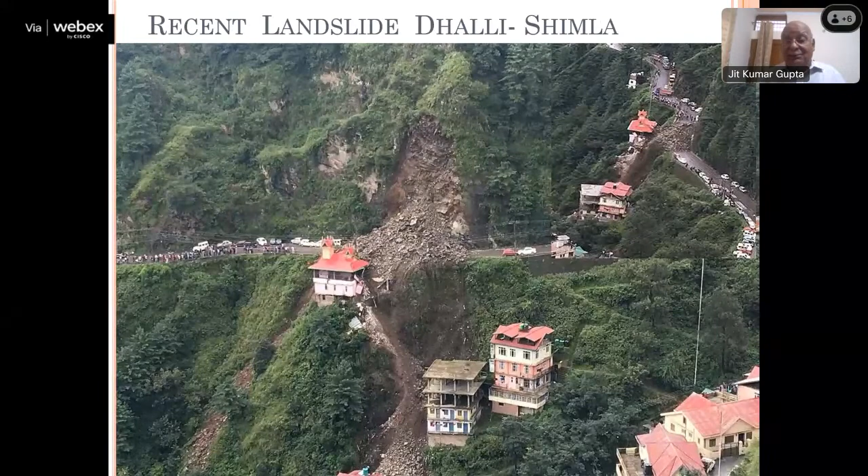This is where landslides in hill areas are becoming the order of the day. Landslides are a major issue, and flooding too is becoming more frequent in hill areas. But when you look holistically at the entire issue, it concerns soil, ecology, flora and fauna, and scientifically cutting and felling of trees.

Unfortunately, land remains the biggest hiccup, and its use and abuse has become a normal process in hill development. I think land needs to be looked at more holistically if hill area development is to be managed.

In hill areas, there is a problem of demarcating land holdings. There is poor record-keeping and a lot of land speculation going on. There are no policies and programs on how to manage land for urban and rural development, and there is irrational and unscientific subdivision of land, which is leading to a lot of problems in rural and hill areas.

When you look at hill areas, the second problem is mobility, that is accessibility, and it is always very difficult. Unfortunately, we are basing more on road-based mobility, and you can see the way highways are being created in hill areas. I think they have their own implications. There's no problem in promoting mobility and accessibility in hill areas—that becomes the lifeline. But when they are done unscientifically, without looking at the structure or the typology of how roads are to be planned, these things create a lot of problems.

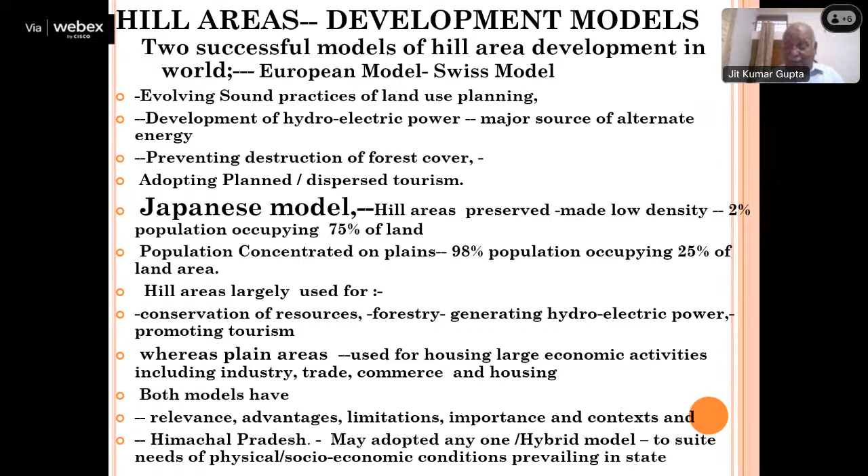और वो दो जो सिर्फ 75% एरिया में 2% पॉपुलेशन रहती है, और 98% पॉपुलेशन बाकी के 25% एरिया प्लेन एरिया में रहती है। तो उन्होंने हिल एरिया को रिसोर्सेज के लिए, फॉरेस्ट के लिए, हाइड्रो इलेक्ट्रिक पावर और टूरिज्म के लिए रखा है, जबकि प्लेन एरिया में सारी हाउसिंग, इकोनॉमिक डेवलपमेंट, ट्रेड एंड कॉमर्स, जितनी अर्बनाइजेशन है वो रखी है। ये दोनों मॉडल के अपने एडवांटेजेस हैं।

दुनिया का सबसे बड़ा जो सिटी है वो जापान का टोक्यो है, जिसमें 34 मिलियन पीपल आर रिजाइडिंग। Regional planning, we know this is advantageous over urban planning. जब तक हिल एरिया में रीजनल प्लानिंग नहीं करेंगे, तब तक we will not be able to achieve and prevent these kind of disaster, because in hill area the region planning takes care of the entire stock of the state itself in terms of resources.

Land use planning जो करनी है उसमें हमने clear define करना है area which are very sensitive, area which are medium sensitive, और जो low sensitivity के हैं। हाई सेंसिटिव एरिया को हमें प्रिजर्व करना है, और डेवलपमेंट जो है वो लो सेंसिटिव एरिया में निकाल के लेनी है। ये एरिया रीजनल प्लानिंग के लिए बिल्कुल डिफाइंड है, नेचर खुद डिफाइन करती है, जिसको हमने समझना है और आगे इंप्लीमेंट करके ले जाना है।

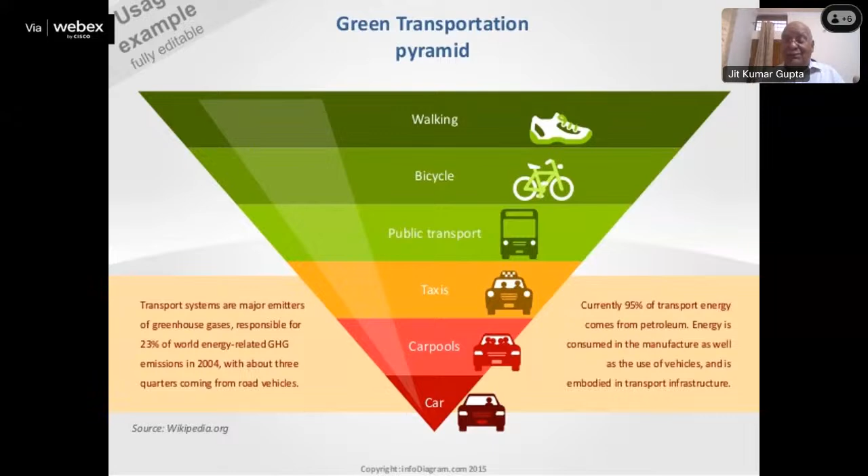उसके बाद हमें सिटीज को कॉम्पैक्ट बनाना है, सो दैट दे आर नॉट मेल्टिंग, दे आर नॉट स्प्रेडिंग एवरीवेयर, दे आर ओनली कन्फाइंड टू एरियाज which are plain area which can take up, or their capacity is limited। फिर हमारी अप्रोच बेसिकली मोटर बेस्ड अप्रोच नहीं होनी चाहिए, पेडेस्ट्रियन या मास ट्रांसपोर्टेशन बेस्ड होनी चाहिए। तो हम एक्सेसिबिलिटी की बात करेंगे, मोबिलिटी की बात नहीं करेंगे, और प्लानिंग फॉर पीपल करेंगे, प्लानिंग फॉर व्हीकल नहीं करेंगे।

टूरिज्म को हम ध्यान से देखेंगे ताकि टूरिज्म रिमेन सपोर्टिव, and the best model remains the model of Switzerland. Then heritage is another area which needs to be conserved. लेकिन सारी लैंड की प्लानिंग जो है, land suitability analysis, this is a method which needs to be implemented, because the entire area of Himachal needs to be mapped in terms of the land suitability - land which is suitable for construction, land with preservation and protection. जब तक ये नहीं होगा तब तक आपकी growth and development rational नहीं होगी।

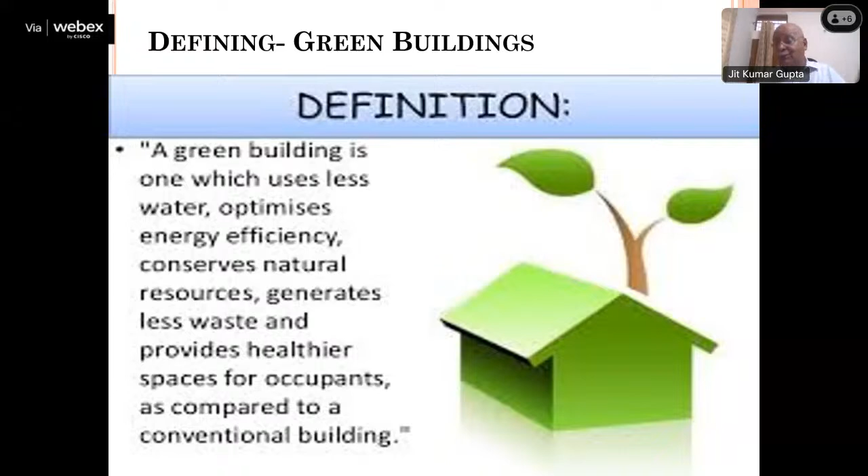Of course, leadership remains very very important. और उसके अलावा जितने भी built environment हैं उन्हें बड़े ध्यान से देखना है कि वो आपकी स्लोप को देख के, स्ट्रक्चर को देख के, टाइपोलॉजी को देख के बने, और आप ग्रीन बिल्डिंग जाएंगे तो आप वैल्यू एडिशन कर रहे होंगे। ग्रीन बिल्डिंग इट्स वर्किंग विद नेचर इटसेल्फ।

तो अभी बात की गई शैलेश पाठक जी ने कि हिल एरिया रेटिंग के लिए है, और अभी सौरभ जी बताएंगे डिटेल में हिल एरिया अडॉप्ट करने के लिए ये जो रेटिंग करने से हाउ यू कैन रैशनलाइज द डेवलपमेंट ऑफ द हिल एरियाज। लेकिन लास्ट में मैं ये कंक्लूड करूंगा, हिल एरिया में अगर डेवलपमेंट करनी है तो नंबर 1, देयर इज नो ऑप्शन अदर देन द प्लान डेवलपमेंट।

फिर सेकेंडली हमें जो करना है, development without destruction, and development based on sustainability. Then we have to have empowering the state in the knowledge and expertise that hill area को कैसे डेवलप करना है, प्लान करना है।

रीजन प्लानिंग की बात की, और रूरल एंड अर्बन को बोथ करना है, और उसमें कैपेसिटी बनानी है आर्किटेक्चर और टाउन प्लानिंग डिपार्टमेंट यूएलबीज में, ताकि दे कैन लुक आफ्टर वेरी क्लियरली। और इनमें सिनर्जी भी लानी है। हर डिपार्टमेंट को एम्पावर करने की जगह उनको क्लब भी करना है। और अल्टीमेटली अगर एक डिपार्टमेंट इनको क्लब करके एक जगह ले जाया जाए तो दे कैन वर्क मोर इफेक्टिवली एंड एफिशिएंटली।

और ह्यूमन सेटलमेंट को हमने पूरा सस्टेनेबल और इफेक्टिव एंड एफिशिएंट बनाना है। और जो लोकल नॉलेज, वहाँ का एक्सपीरियंस, एक्सपर्टीज इतने साल का है, उनका फायदा उठाना है। इसके लिए involving people and community will remain very very important, but nevertheless I would say it will be more empowering the local community and the people, and looking holistically। You can't divorce hill area from the plain area, because the growth and development of plain area, jitni bhi flooding ho rahi hai plain area mein, they are all basically what is happening wrong in the rural hill areas।

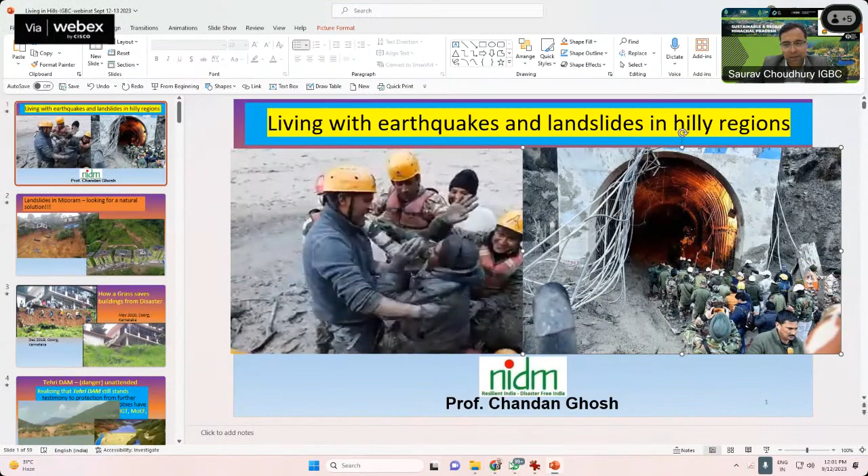Okay, first of all sir, thank you for giving you the presentation rights. I'm just sharing the presentation. Please go ahead and share your entire screen. Is it coming? Yes sir, we can see it. It's coming, full screen, and then we can see. Let me... yeah, at the bottom, the fourth one. Yeah, yeah. Okay, is it, is this the slide? Can we see? We can see some notes or a script on top. Is it looking, actually there's a dual screen sir. If you could just go back and share your screen again, you can press escape and share it again. I think there is some issue. Stop, is this... yeah you can press the escape button, I think it will go back. Okay yeah, you can share again. Something is happening, let me check. Maybe you can restart the application for the PowerPoint. Yeah, you can convert it into PDF sir, sometimes if there's not much animation it is okay to convert it. Yeah it's coming now, or you can present it from this mode also, it's fine. Generally, let me put it in F5, it should go as full screen. Yeah, now it's full screen.

Please, okay, thank you. First of all, thank you for this wonderful session, especially the ecosystem to be followed in hill areas, which has shaken us without even an earthquake, with the rainfall and the kind of development work that is going on. Nothing much to say or elaborate, but we are seeing that whatever we have been creating, whatever way we are trying to foray into the hill area, is not sustainable. So in this presentation, I would like to take you towards how to live in the hill area. Even though earthquake is a separate issue, I will first show a few things about how to live in an earthquake area.

I am not showing what is resilient structure, but what kind of construction we are doing in the hills and how they are to be tested before earthquake, during earthquake, and after earthquake. The first photograph you can see, you all remember 7th February 2021, the Tapovan area, the Vishnugad area got totally flooded — not flooded, I would say it is all debris that came more than 20 kilometers away, which was not known to the construction workers, resulting in many people dying.

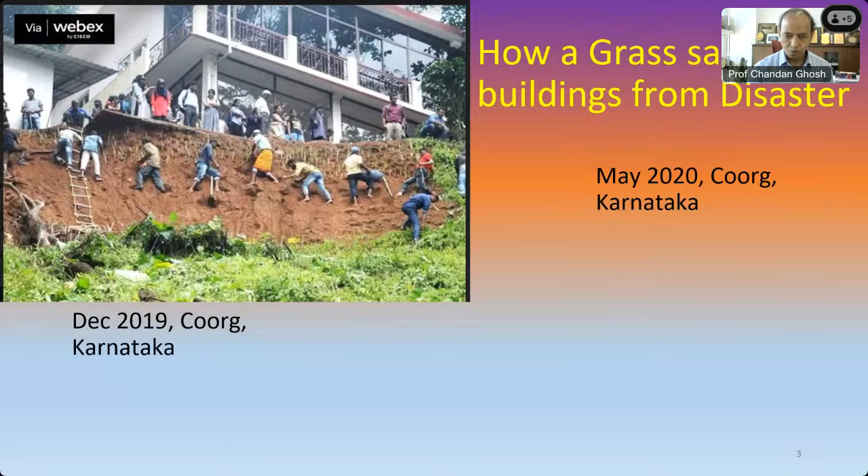So those have been planted in December, and then they could grow in six months of time in this manner. We may like to do a lot of research on how the grass has worked, maybe a lot of thesis work, presentation, or research reports can find out. But the reality is that they have been able to take care of the building, where community people came over to see that grass being planted.

And this is how it has been able to save, which cannot be accepted so easily by the geotechnical engineering or geology or bioengineering community, or especially geotechnical from the civil engineering field. They may take this just as a case study, saying it just worked like a fluke, but it is not like that.

Let us take such kind of eco-restoration by natural resources very seriously, and take care of many of the landslide situations shown over here. These can be easily handled, rather than allocating several crores of budget, which becomes a game changer in our society, whether from the professional side, the management side, or the landslides that we are facing.

So let us take it in reality, how they work over here. Site selection and selection of the grass becomes very important. It is just to say that we are having the Tehri Dam, which is the country's highest dam. And we are also bothered about the siltation, that its reservoir getting filled up every time.

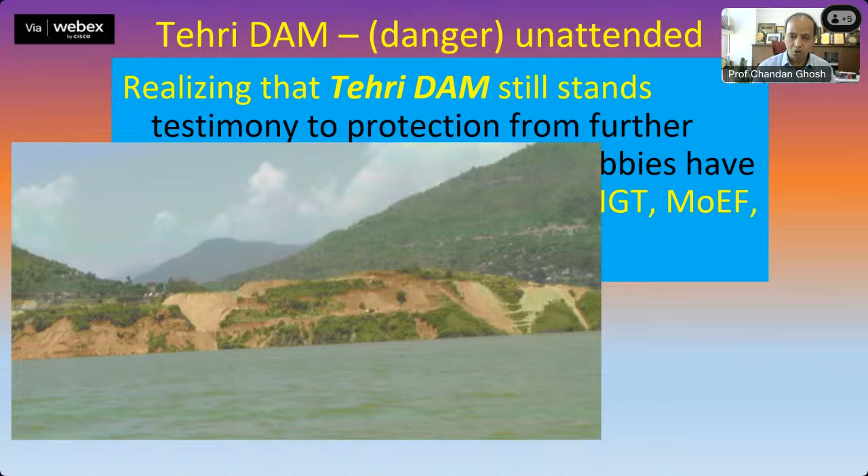Let us not just get overlooked by the way things are displayed in some seminar or exhibition, showing how beautiful it looks that we have the country's highest dam, 262-meter high. But the actual health condition of the reservoir is like this, which is being neglected, or in the process of making a huge plan for taking up desilting work every year or after some interval.

Let us also look at the fact that several dams are under construction. We cannot afford to have some other alternative, but wherever it is feasible, they have to be made. But at the same time, we have to find out certain alternatives, when such kind of dams are creating a lot of trouble in the ecosystem.

And climate change, and many other effects of seepages, and many such biomass are getting, rather ecosystems are being modified. So what are the impacts that it is causing to our environment? We are not able to take care of this through the EIA, environmental impact assessment.

In fact, from our side, many of us are emphasizing there should be disaster impact assessment also. It is very lucrative to hear such kind of disaster impact assessment, or environmental impact assessment, or post-disaster need assessment. So many things are coined, but assessing them in reality is not an easy task.

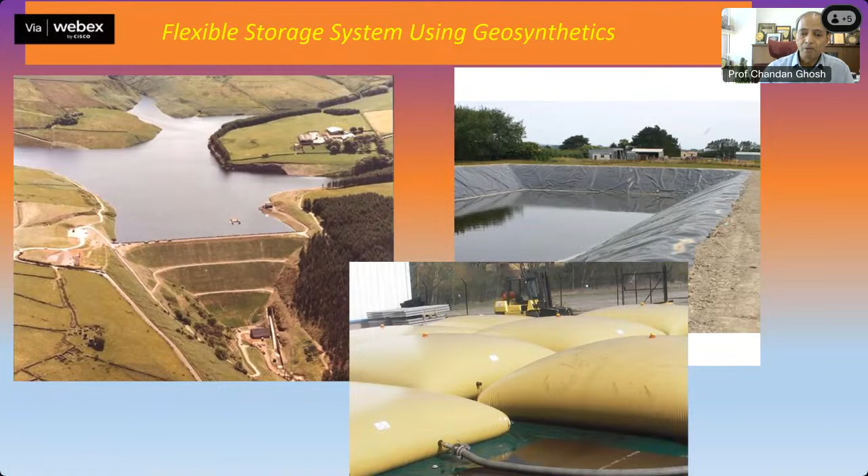In order to restore and keep water, we need materials that can store water without much loss, or that can be covered thoroughly to reduce evaporation loss. Several such things can be stored even in hilly areas, so we don't have to depend on so many pipelines passing through the lanes and bylanes. These often get disturbed and leaked and remain uncontrolled. But if water is stored at every house or at the hilltop in this manner, it can be carried to the desired location more easily in times of need.

For the human race, the Earth is a blessed planet because of its position in the solar system and its physical dimensions, so the Earth is cool enough and we are all surviving here. Even searching several lakh or billion light years away, we have not been able to find another planet like Earth. So let us enjoy this living, but we have to make our living sustainable and resilient enough.

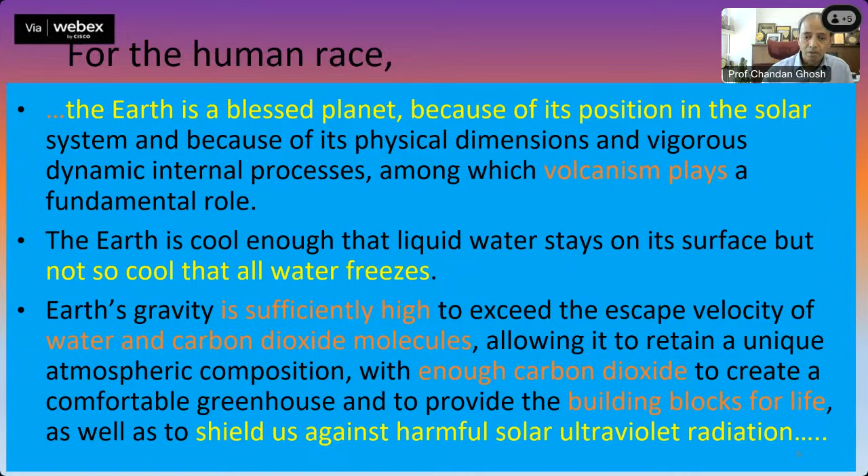When we look at school buildings, in the Nepal earthquake or in our cases also, building floors and tables and other things were affected. There are many showcases, conferences and seminars describing the vulnerability of such school or hospital buildings. We know which areas are earthquake prone. Every day, every second, these earthquakes are being recorded and placed on a global map, so we are able to map the occurrence of earthquakes.

The zonation of the entire Himalaya, east to west, about 2,400 kilometers, is in the severe-most seismic zone. Despite knowing this, we are making many such structures in our Himalayan area, without taking care of earthquake effects in design.

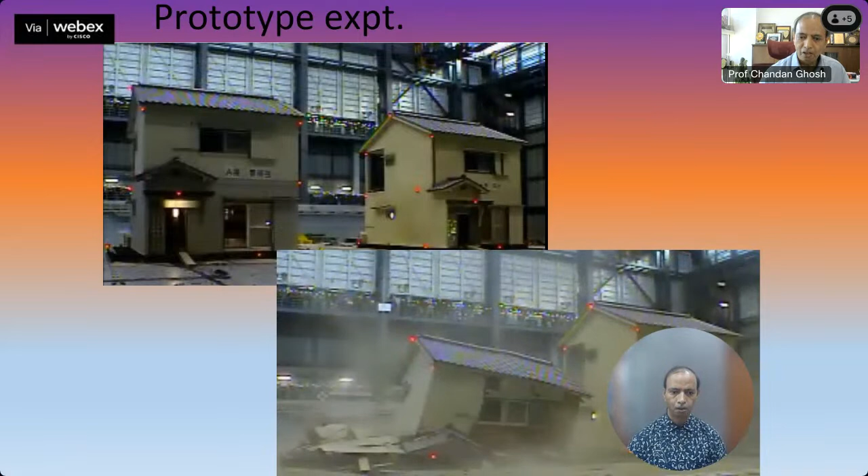But when we see a building and test it, it fails. There are earthquake-resistant designs, and we can see test studies done in Japan, showing how nicely they have constructed buildings. None of our buildings in hilly areas or even in plain areas, strictly follow codal provisions that beams and columns have to be centrally placed. When tested under an earthquake, you can see where it has failed.

The column itself didn't fail, but it failed due to this parapet wall. These findings need to be shown to our engineers, contractors, educators, society and planners together, showing what kind of impact earthquakes like the Nepal earthquake, Bhuj earthquake, or Kangra earthquake have had, since these are all recorded and can be regenerated into a 5, 6, 7-story building model and tested.

We also saw the twin earthquake in Nepal, but we are totally helpless to get any early warning. When the first shock occurred, our team visited for the rescue operation, but then another earthquake of very high magnitude occurred near Everest. What is the aftershock effect here? These may be aftershocks, related or unrelated - there may be scientific explanations from the seismologists.

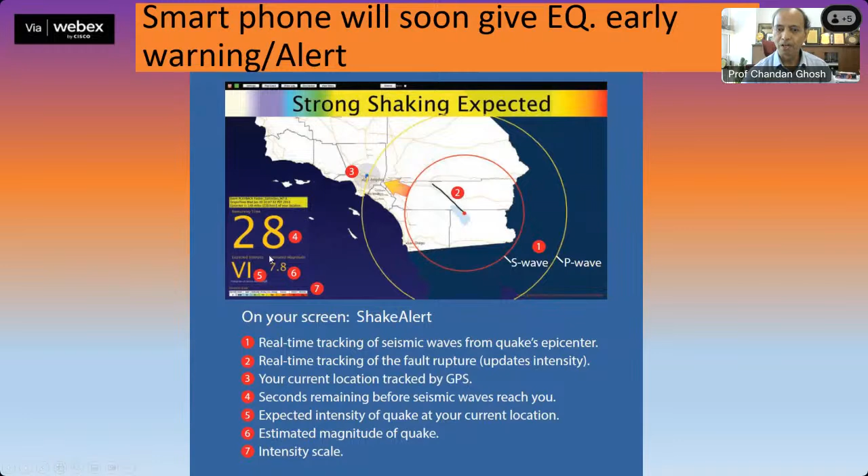So in the name of earthquake early warning, this is a sophisticated approach available in some other countries, but we have not yet come out publicly because of our research, our investment, our mindset, and our contemplation about earthquake prediction, which is more significant in the minds of people, especially some scientists. But from the civil engineering side, we look at the reality of getting it onto a mobile phone with geotag, so that people get a signal immediately wherever they are, with such kind of early warning in the case of earthquakes.

Taking an example of what happened in 2014, 24 students were swept away when dam doors were opened up, and then such notices were put up afterward. These post-disaster measures are too sarcastic, even though realistic, saying 'please don't go down.' Whereas a siren system or sensor system, as I was mentioning in the beginning, would have been more rational to adopt for everyone, rather than putting up such a warning system after the fact.

Although this is a basic measure we are familiar with, there are earthquake-resistant buildings in hilly areas itself that have survived for more than 500 years. We still need to consider what measures they used, which we are yet to emulate.

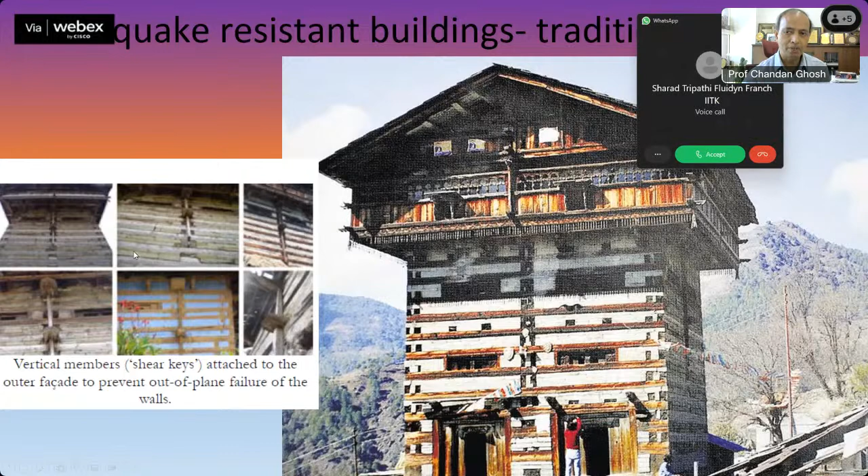So you see the specific case studies available from Uttarakhand. These are all more than 150 years old buildings, college buildings, making hill habitat with such kind of construction. But this is not affordable because these are all natural materials used in those days. However, a lot of light gauge steel frame materials are available, and we can make affordable houses using such kind of construction.

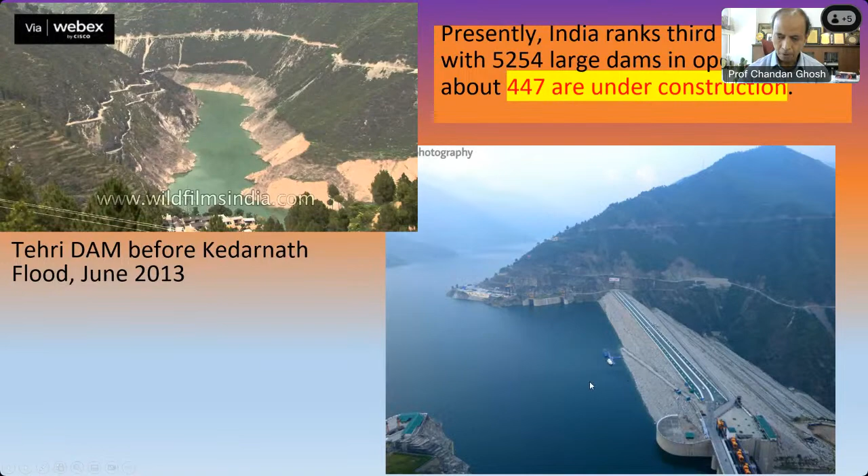Which are very, very strong and resilient in the hill area. So I'd prefer to describe that dam in Uttarakhand, how much water was there before the flash flood occurred and how much came after. So there were certain savings at that time.

Anyway, the hill areas that we have built in this manner are not going to sustain, even though these are dotting our hill areas. So this is not the way, and that is why we are facing problems.

So this is in Shimla. When we make buildings on such sites without understanding the subsoil, they surely create a lot of trouble and subsidence, which is highly neglected in our culture of hill habitat engineering.

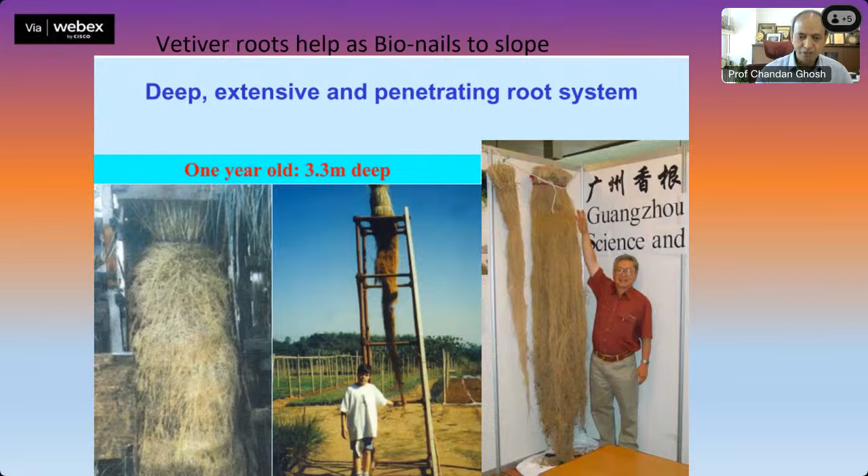So what I would like to say is that grass can grow this much, even 3 meters or more, for erosion control. Grass can hold the slope of the hill at more than 60, 70, 80 degrees, whereas normally we construct our embankments at 30, 35 degrees. This is natural, and we have to understand and apply it.

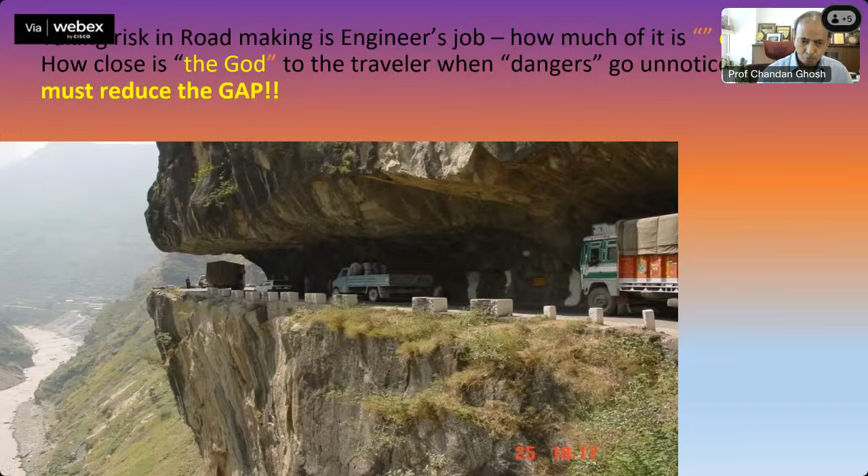While we are taking the facility of this kind of road for more than 50 years without any danger, we do not know what danger is ahead. At the same time, we also swear by God that while going on a hill road area, let a God-like person or entity save us.

So we have to minimize risk by knowing the things involved and making our construction resilient enough. Thank you very much.

Thank you for highlighting briefly the various case studies across Coorg, Nepal, Sikkim's bridge construction in various sectors, and also various technologies. Now moving ahead, let me just share my screen.

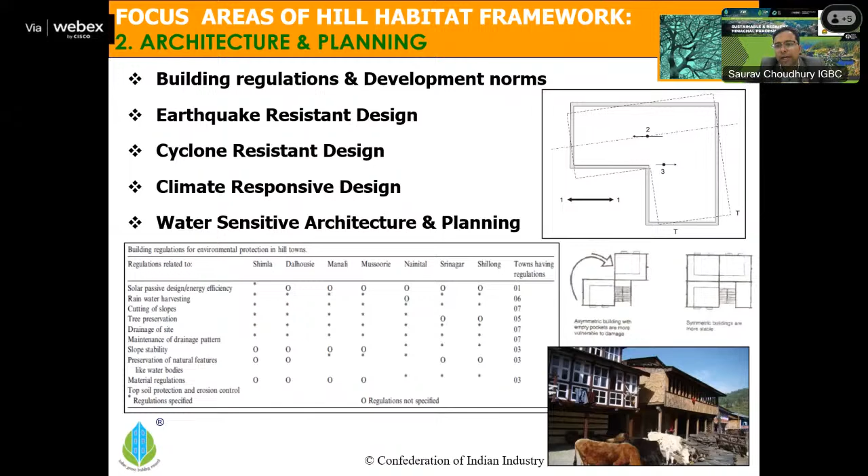जरूरी है कि हम इसको ऑन ग्राउंड इंप्लीमेंट करें. तो उस बारे में अगर हमें इंप्लीमेंट करना है तो हमें फोकस करना है अप्रोच पर, and you can adopt this rating system in the cities for a small pocket of a building or a larger development. दोनों cases में आप इसको रेफर कर सकते हैं, and then you can find out how you can do it better. You might be doing it good, but we can make it more effective and more resilient by adopting some specific norms.

Now construction approach की अगर हम बात करें, ऑल द सिविल इंजीनियर्स जो आज होंगे इस मीटिंग में, वो जानते होंगे इसके बारे में कि जियोलॉजिकल फैक्टर्स है, क्लाइमेटोलॉजिकल फैक्टर्स है, नेचुरल हैजर्ड फैक्टर्स है, बिल्डिंग फीचर्स है, अफोर्डेबल एस्पेक्ट्स है.

तो हमें एक्सेसिबिलिटी, अफोर्डेबिलिटी और अवेलेबिलिटी, ये ऑल द एस्पेक्ट्स को ध्यान में रखते हुए सिटीज को डेवलप करना है हिल स्टेशंस पे. और कैसे करना है, एड्रेसिंग द लोकल कंस्ट्रक्शन टेक्निक्स आल्सो.

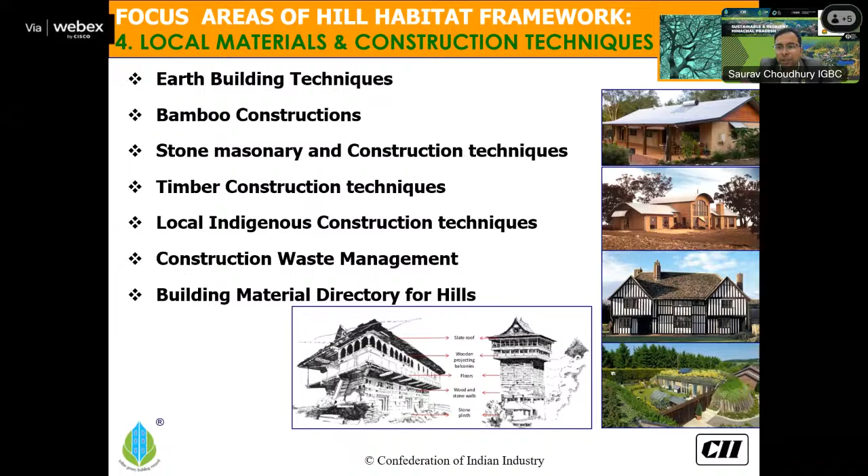So local materials like the earth building techniques, हम कहते हैं berm structures और bamboo construction, stone masonry, construction waste को कैसे हम reuse कर सकते हैं, जो कि आजकल major hill cities में हो रहा है. Major cities में भी they have tried to have a plant itself in the city to have the conversion of this waste construction and demolition waste into paver blocks and etc.

So measures for earthen construction, bamboo construction, stone construction, timber, and all these you will find in the rating system also, so that it makes it easier for doing any kind of construction. So हमने different guidelines all over the world, different construction practices को study करके incorporate कर दिया है as annexures in this document, जो कि आप refer कर सकते हैं as part of IGBC Green Habitat Rating System.

इसमें हमने एड्रेस किया है एयर, वाटर, लैंड, एनर्जी, वेस्ट, मोबिलिटी एंड ऑल द डिफरेंट वेरिड एस्पेक्ट्स रिलेटेड टू कार्बन एंड अदर्स क्लाइमेट चेंज. सो की इश्यूज रिलेटेड टू हिल सिटीज को स्पेसिफिकली ध्यान में रख के बनाया गया है. इट इज नॉट ए कॉपी पेस्ट ऑफ प्लेन्स में जो हम इंप्लीमेंट करते हैं. इट इज कंप्लीटली डिफरेंट व्हेन यू एड्रेस दिस, बिकॉज एयर इज वेरी क्लीन, but air is very strong also.

There is cold winds, strong winds which can break your glasses. So we need to think how we design it. The wind speed is different. Water might be there, then the water flow is different. Water speed is different. The land might be there, but the land is in a constrained situation.

तो ये सारी चीजें ध्यान में रखते हुए committee ने ये decide किया कि there has to be all stakeholders should have a role - city authority, developers, architects and citizens, and then 10 key aspects to be addressed in this rating system.

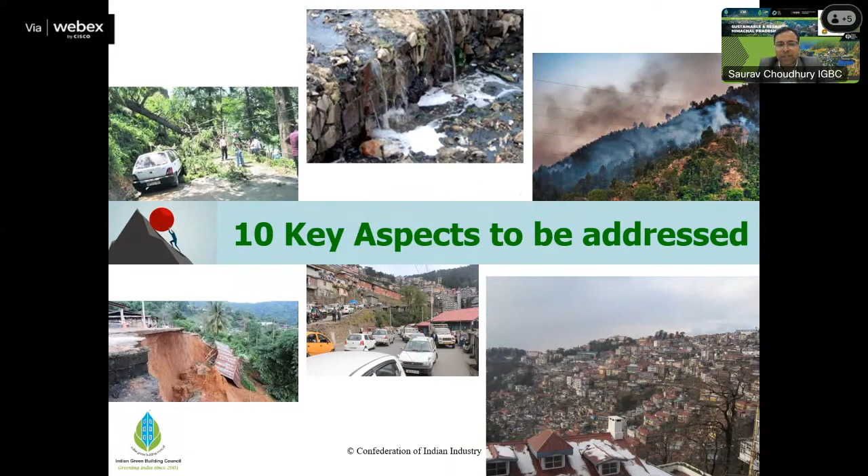So 10 एस्पेक्ट्स में पहला एस्पेक्ट है सॉइल इरोशन के बहुत सारे क्वेरीज है. जब भी हम विजिट करते हैं, कमिश्नर से मीटिंग्स करते हैं, इवन इन द सिटीज लाइक हैदराबाद वी डिस्कस दिस द इशू रिलेटेड टू सॉइल इरोशन एंड देन फ्लडिंग. सो लैंडस्लाइड्स, फॉलिंग ऑफ ट्रीज, ये सारे इश्यूज है, ये आपको भी पता है.

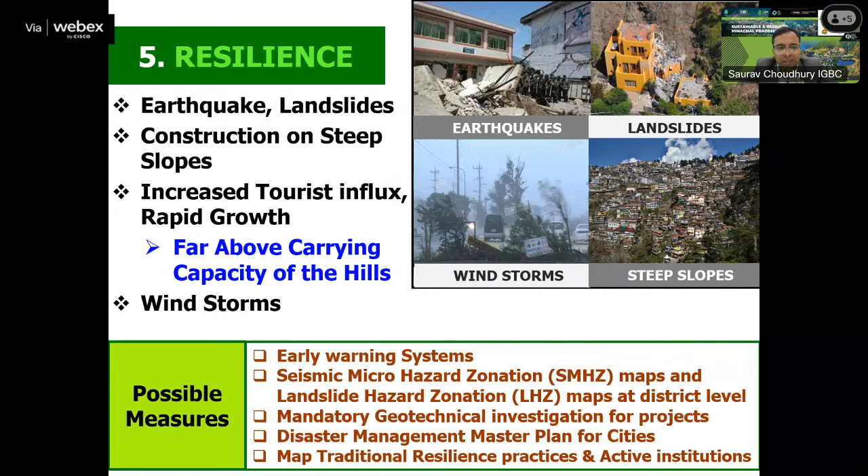Talking about resilience, a lot of discussion has already happened on this, so we would say there should be early warning systems and disaster management plans.

For municipal solid waste, there is difficult terrain and land crisis, so as dump sites keep forming in all hill stations, we need to avoid that. There has to be involvement of experts to prepare the city solid waste master plan. All hill cities should have a city waste master plan. A ministry document has come out called Waste Wise Cities, which also mentions all the best practices by the ministry.

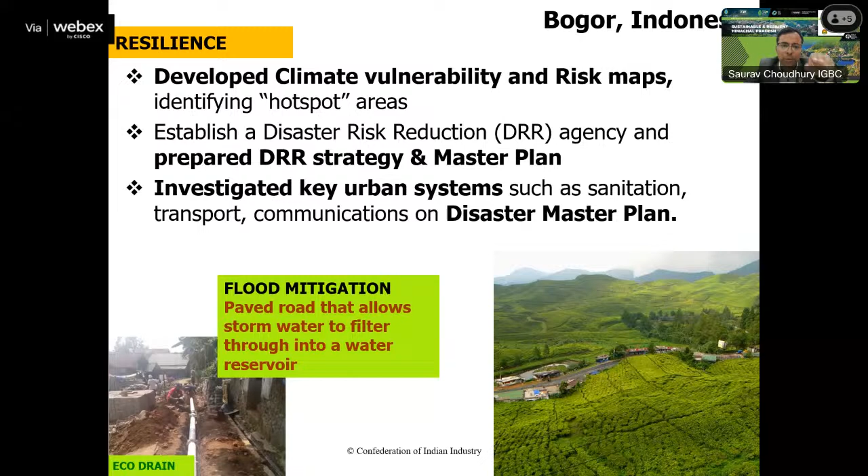तो कैसे हम क्रिएट न्यू वाटर बॉडीज, लो लाइंग एरिया पे वी कैन क्रिएट आवर ओन वाटर बॉडीज, फेज वाइज पीरियोडिक प्लान कर, respective norms should be there.

Tree inventory का एक focus रहे ताकि जैसा कि tree per capita है इंडिया का, it is quite low, it's only 42 और global average है around 420. So it is quite low as compared to the global average, where we need to increase our tree cover, और tree cover के साथ साथ जियो टैगिंग भी जरूरी है tree cover का.

ये मैं कह रहा था environmentally degraded areas का कैसे mapping होना चाहिए, and this is one of the World Bank studies which also highlights कि concerns क्या क्या है. पहले concerns को avoid करें.

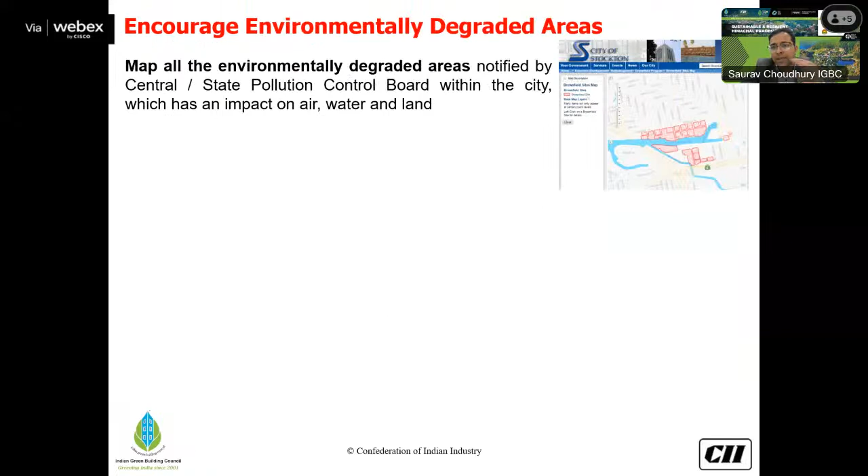और ये है आपका एग्जांपल फ्रॉम द स्टॉकटन, सिटी ऑफ स्टॉकटन, कैसे उन्होंने मैपिंग किया हुआ है सिटी के अंदर, कहाँ कहाँ इस तरह के ब्राउनफील्ड डेवलपमेंट्स हैं जहां हम रीयूज कर सकते हैं फॉर अर्बन डेवलपमेंट.

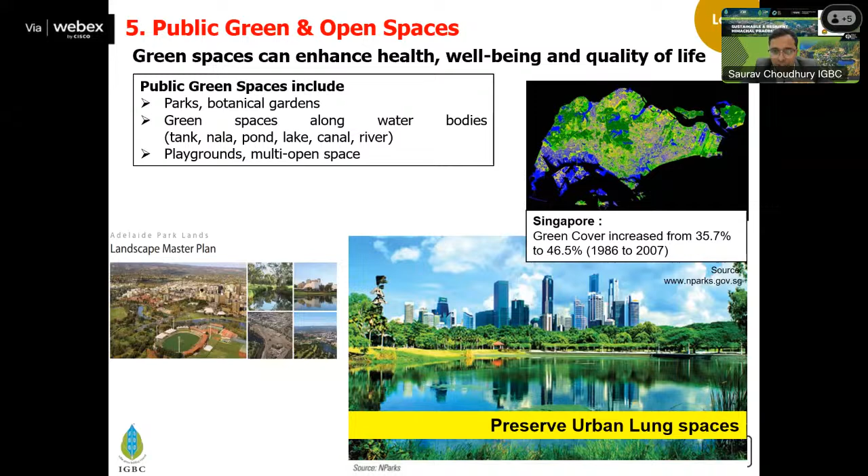देन पॉलिसीज हो सकती हैं, और आपका सिंगापुर इज बेस्ट एग्जांपल इन एशिया, बिकॉज हम देख सकते हैं वहां कैसे उन्होंने 46% से भी ज्यादा उनका ग्रीन कवर है. सो हम कहते हैं सिटी विद इन ए गार्डन सिंगापुर को.

सो जैसे आपका एक्सेसिबिलिटी की बात करें तो वहां है 66 स्क्वायर मीटर पर कैपिटा सिंगापुर में, और इंडिया में हम एक्चुअली कई बार वर्ल्ड हेल्थ ऑर्गेनाइजेशन के रिक्वायरमेंट ऑफ 9 स्क्वायर मीटर पर कैपिटा को भी मीट नहीं कर पा रहे हैं इन सिटीज. सो वो भी हमें देखना है कि कैसे हम 9 तक पहुंचें और उससे भी काफी आगे बढ़ें.

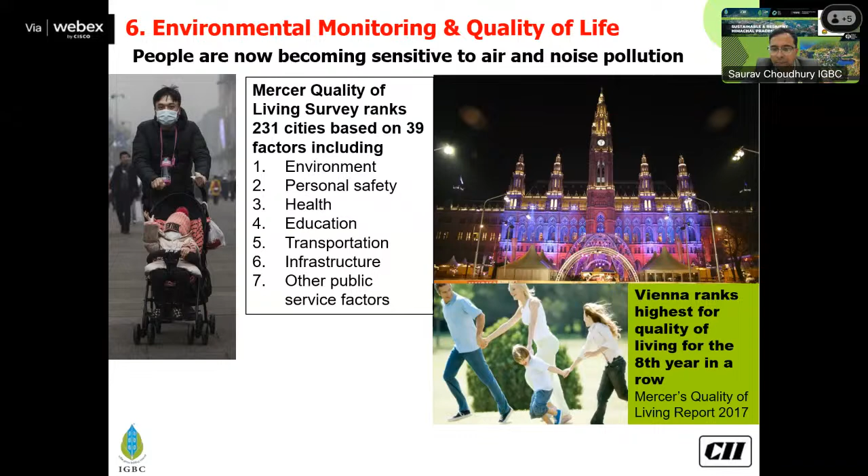और द रेटिंग सिस्टम विल एड्रेस द क्वालिटी ऑफ लाइफ ऑल्सो. जो ग्लोबल इंडिकेटर है MERCER का, उससे भी अलाइंड है रेटिंग सिस्टम. एयर क्वालिटी मॉनिटरिंग से भी रिलेटेड पैरामीटर्स देखे जाते हैं रेटिंग में.

बैरियर फ्री एक्सेसिबिलिटी, जैसे कि बर्लिन कहता है कि 100% बर्लिन विल बी बैरियर फ्री. वी नीड टू एटलीस्ट एड्रेस दिस इन द पब्लिक टॉयलेट्स, पब्लिक बिल्डिंग्स.

अगर मेरे साथ कोई इंसिडेंट हो जाता है तो अगर मैं पार्क जाना चाहता हूं, और पार्क जाने के लिए मेरे पास एक रैंप एडिक्वेट नहीं है और वहां जाने के लिए एक रिवॉल्विंग डोर लगा हुआ है, तो इट डजंट एनकरेज मी टू गो टू द पार्क एज ए डिफरेंटली एबल्ड ऑन ए व्हील चेयर. सो हमें देखना है कि कैसे ये बिल्डिंग्स, पब्लिक टॉयलेट्स, रोड क्रॉसिंग्स, हर जगह डिफरेंटली एबल्ड को एड्रेस किया जाए.

सिंगापुर हैज 40% ऑफ द वाटर इज कमिंग फ्रॉम द ट्रीटेड वाटर, जिसको हम न्यू वाटर कह रहे हैं, NEW और WATER में W is common, they are calling it new water. 40% of the requirement is met this way, and many other international examples are also there where they are doing lake development and DEWATS systems.

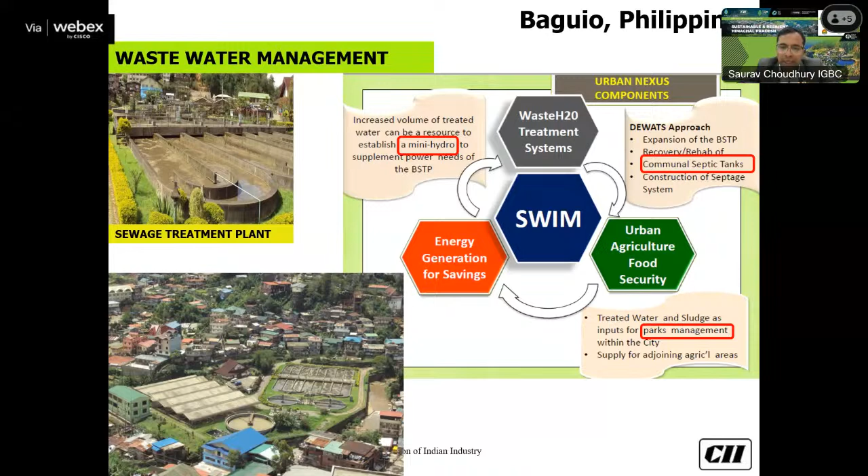Urban agriculture का भी very important nexus है. कोविड में हमने देखा कि जो अर्बन एरियाज हैं उनको फूड की, they were getting issues of addressing food security, because villages से urban areas में नहीं आ पा रहा था during COVID. So sometime we need to plan our food in our urban areas. One good thing in hilly areas is they are very close to agriculture also. Urban agriculture definitely needs to get a place in the master plan also.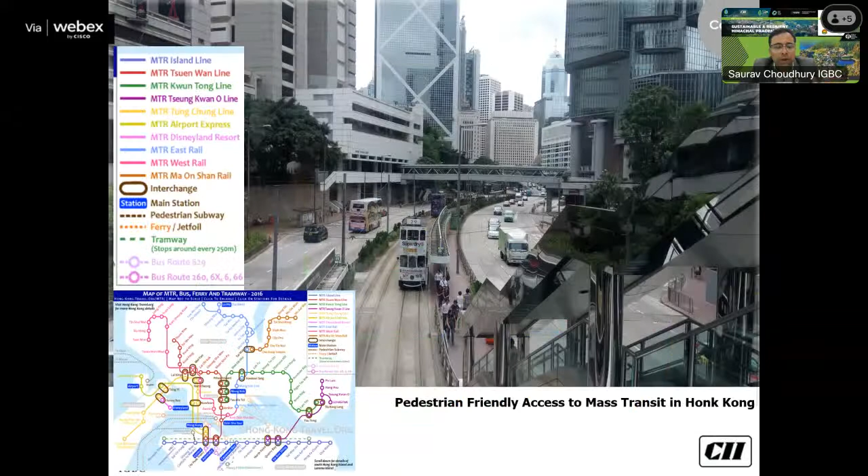So this is like Hong Kong, which is a hilly terrain, 60% hilly. You can see here also that all people are well integrated. First and last mile connectivity - most of you are aware. And this is like Hong Kong again, which is 60% hilly.

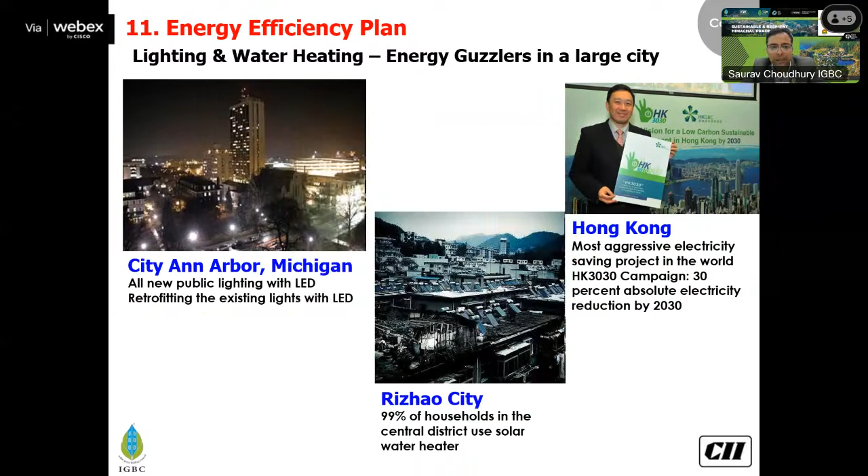They are also targeting a 30-30 campaign, saying that 30% energy reduction will be there. Or the city of Rizhao or Ann Arbor, Michigan, they are targeting 100% LED or not. Or solar water heating - there is a huge opportunity when we are in hilly areas.

For the bathing, we don't use the water which is heated by electricity, but these are some of the hotels, toilets and public toilets and other things which I already shared with you. Dehradun is a very good example on the parking policy.

Mountain livelihood will again be shared by our colleagues in the next presentation. Our rating system was developed from 2013 to 2018, over 5 years of rigorous study on all the national codes and standards, which you can see here. Many of the experts involved are actually speaking in today's program, so please share your questions and have your discussions. These are many of the international guidelines that exist.

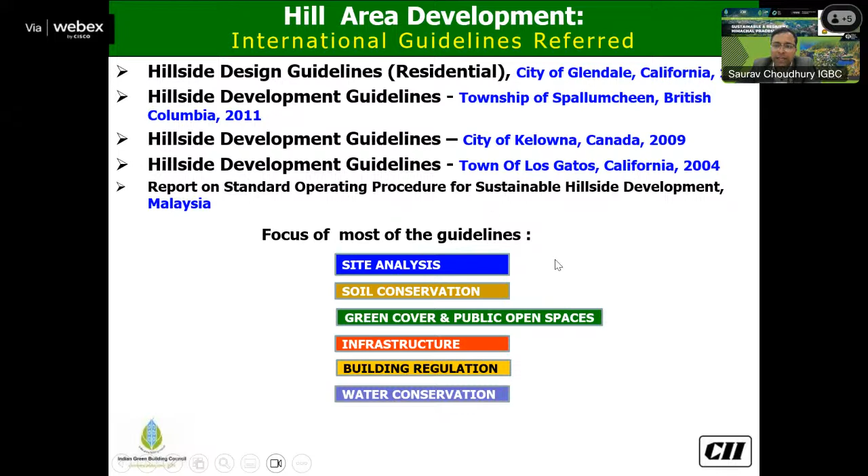There is no rating system worldwide for hill cities, but we have one in India. The first rating system in the world has been developed here. Many technical committees worked on this, and it has been adopted for the first time in the world by Kedarnath. So we invite you for the Green Building Congress, focusing on net zero and other aspects related to buildings and decarbonizing cities.

I hope I could give a small capsule of the whole thing, the Green Hill Habitat, to the audience in the hill cities. I know this 10% of the population is concerned with how we do hill-centric development in all these hill cities. So, over to the next speaker. Over to you, Aspia. Thank you.

Thank you so much, Saurav, for the holistic presentation where you highlighted various aspects of design, the top 15 best practices, and the best ways to plan, supported by various case studies.

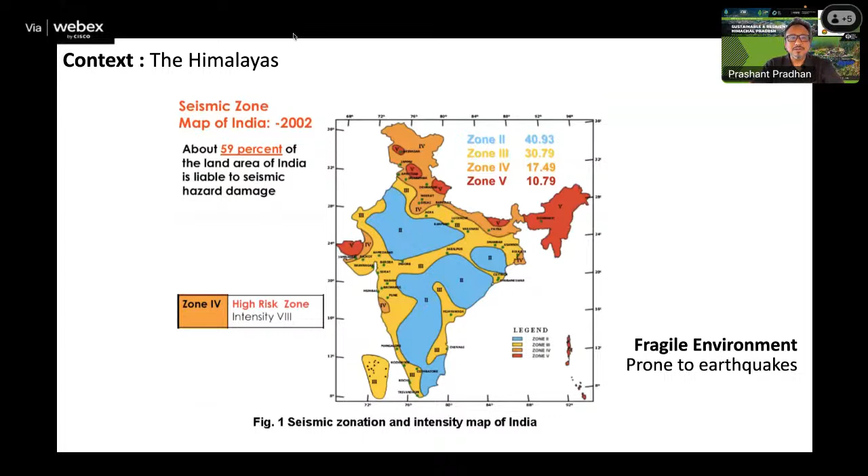Our context is this: we have the hills, we have the mountains, and that leads onto the plain. This is the topography, and it is a very fragile environment where we are always prone to earthquakes, as the previous speakers elaborated on the types of disasters we've had based on earthquakes. I'm sorry, my Hindi is really not good enough to present in Hindi, so I will have to resort to English only.

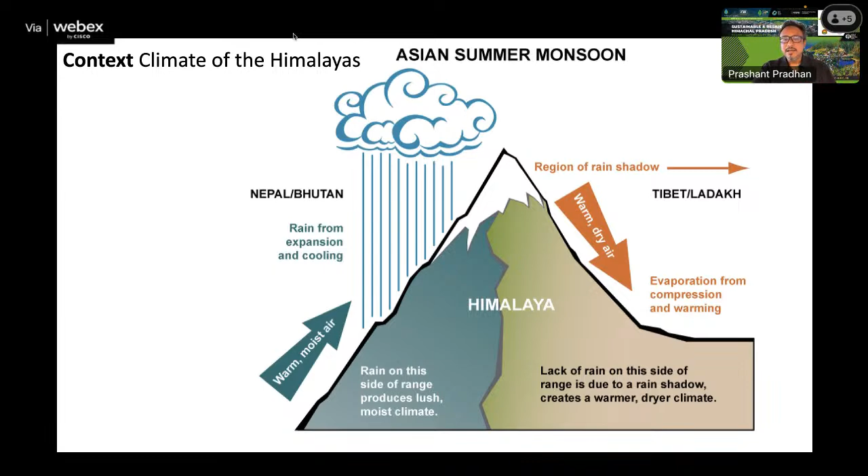It is because of that we have this very interesting geography, and this is something I learned in class 7 or 8 during my school years - the sea currents that come from the Bay of Bengal and Arabian Sea, and how they impact our entire hills, because the clouds cannot go beyond the Himalayas. The Himalayas form a barrier, and all the rain-filled clouds end up falling on this side, and that's how Tibet ends up becoming the rain shadow. So it is relatively dry in Tibet, but Nepal, Bhutan, Sikkim, and the entire Terai region is extremely wet. And that essentially causes disasters like landslides.

And with buildings, it exacerbates the kind of disasters that we have. So form follows context, essentially adapting architecture to the environment. I think we have to stop thinking that we can adapt the environment to the buildings we desire, but we have to go back to adapting our architecture to the environment.

The first project I'll run briefly through is a proposal for an education city in Bhutan. It's at a planning level. We were invited to propose an education city in this area between Thimphu and Paro. So we made a computer model based on the contours we were provided, and this was the site.

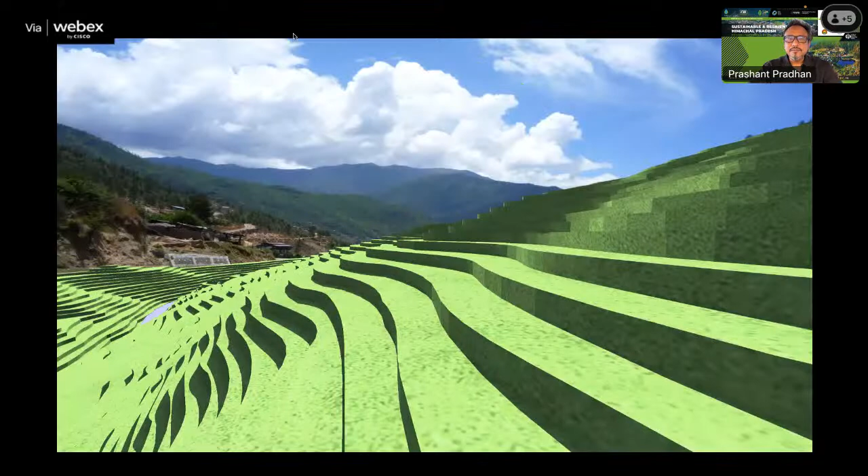The first thing we did was a slope analysis, identifying the very steep slopes, the moderate slopes, and the very gentle slopes, making sectional profiles. What was really interesting in working in Bhutan was that they have land use based on slope - something I think we need to do here in India as well. I don't know if it's done already, but it was fascinating to understand that certain infrastructure or building types, land use, could only be built on certain slopes.

So if you look at 0 to 5% slope, infrastructure or high density residential could be planned there. 5 to 10% is for urban development, high density residential, commercial, and so on. So the entire land use is based on the slopes of the hills.

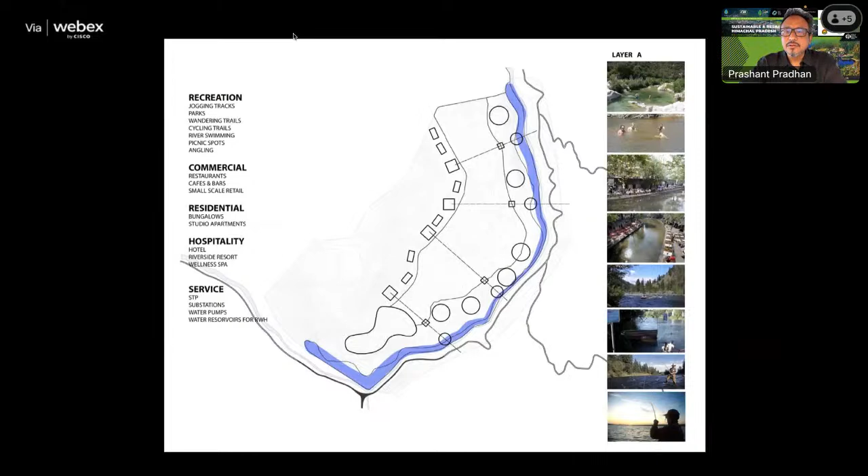Also, on the site, we found there's a river going through along the periphery. So we thought recreational activities close to the river could be placed there. Then the area above the river was slightly more steep, so we thought we could plan small villages that would be the housing for the university.

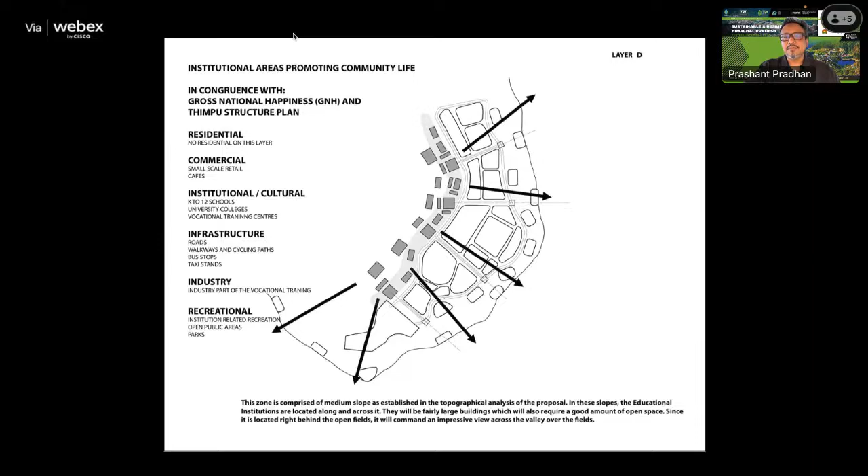All the students and staff could stay there, planned in a design similar to the villages existing predominantly in Bhutan. The central space, which was the flattest, was reserved for sporting activities and other recreational activities like football, basketball, parks and recreation. And the areas right on top is where the university buildings, the academic buildings, could be located - giving them a vantage point looking out into the valley.

And these are the structures we thought could be part of the academic colleges. This was the commercial hub of the university that could look something like this. This is also in Thimphu.

To connect them, because it's a slope, we used something called funiculars, which they use in Switzerland and parts of France. Accessibility is a really important aspect of living in the hills, and we can't have vertical elevators. I've seen one in Shimla that works, but we don't have mechanical ways of transporting people generally, so that's why the roads end up so choked. In Sikkim too, we have a terrible mobility problem. So using funiculars like this is a really good way of mitigating that and enabling access. So this is a basic master plan we came up with, and the project didn't go any further from there.

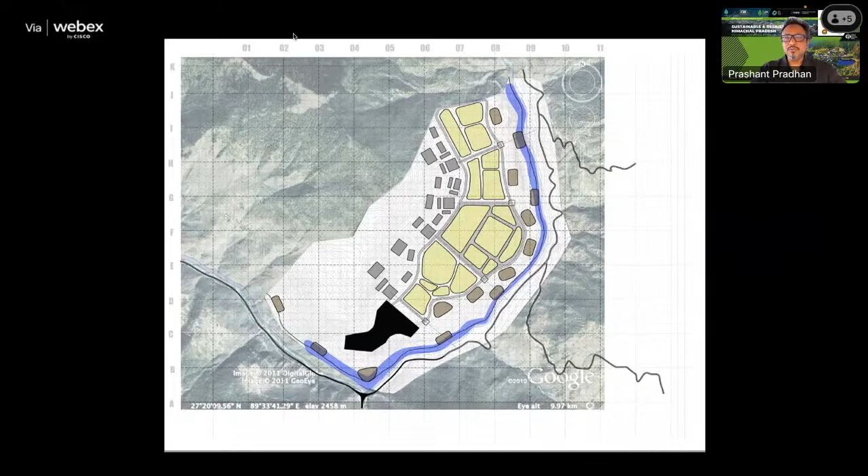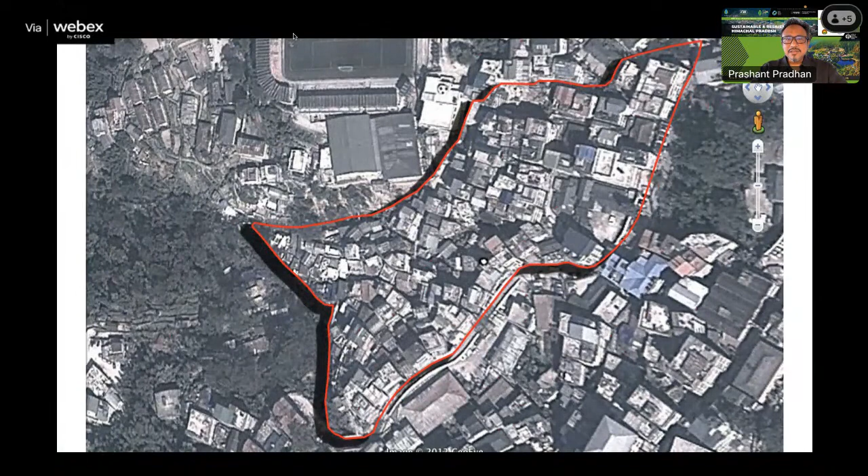The second project I'll show you is a proposal for slum upgradation in Gangtok. I was part of something called Rajiv Awas Yojana. So we had identified the different slums in Gangtok - this is a map showing where the slums exist. There was one slum chosen for the pilot project, called Bhanugram, as highlighted on this map. So this is the profile of that slum.

This slum was broken into 3 different categories: one being where the pakka houses are, second being where the semi-pakka, semi-kacha houses are, and the third being all kacha houses.

This is the design strategy. What was really interesting in this Google photo is that the area below that triangle has no building, and it has no building for a reason: it's the most fragile land in all of Gangtok, almost. So you can't really build there. People, even though Gangtok is overbuilt, found this area to be practically unbuildable.

That area close to the triangle is a confluence of two very large watersheds, these very large streams, that come together there. The first thing in dealing with that was the slum there. There's a large number of people who live there in kacha structures. Dealing with this meant first dealing with the water, how do you deal with the water that flows. You have to allow the water to flow, and you also had to provide habitat solutions for the people there.

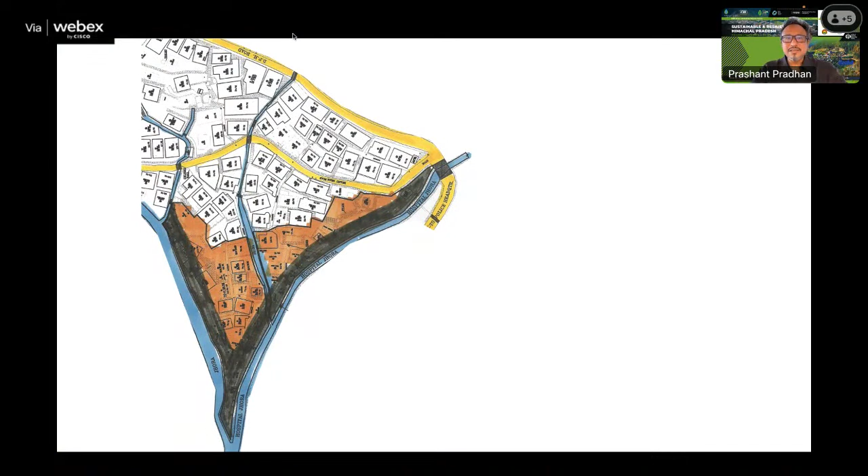So we thought we could mix and match these two and have this as the zone for the new housing. This central area would be left vacant, and the area around it is where we could strengthen these jhoras, or streams, and also use that structure to dovetail some light building in that area.

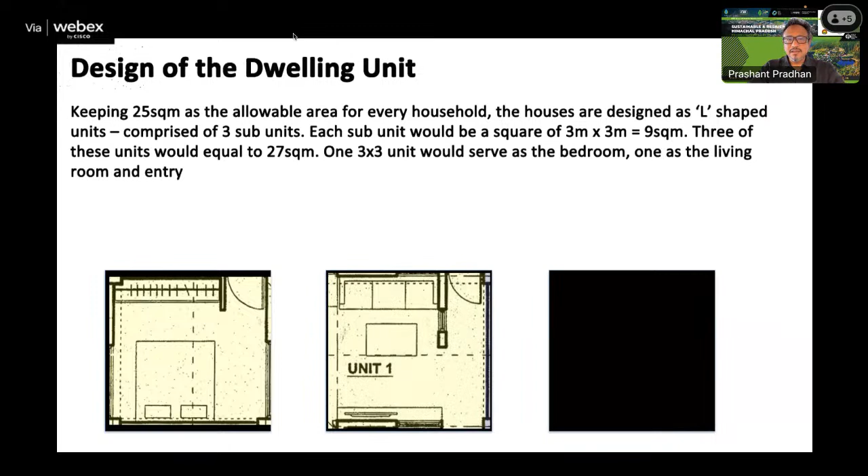We placed it in an L shape, and this would be the design of one dwelling unit. Mirroring that unit would make it a C-shape, and mirroring that again would make it a square shape with a courtyard in between.

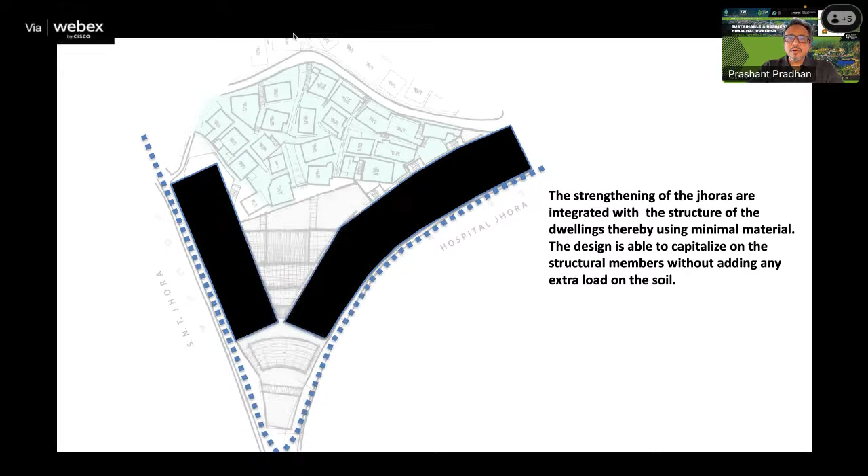So all along that stream, this is how we thought we could locate the dwelling units. The strengthening of the jhoras is integrated with the structure of the dwelling, thereby using minimal material. The design is able to capitalize on the structural members without adding any extra load on the soil.

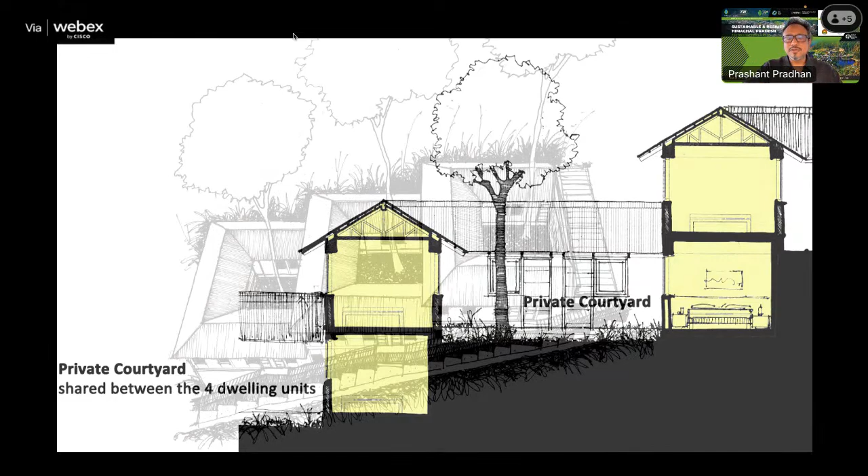So this is how we had imagined this structure would come up. This would create a kind of private courtyard in between, and then you'd have ground or ground-plus-one structures, built with extremely light materials.

This didn't go forward because Sikkimese rules for owning property are very complicated, so this kind of didn't move forward.

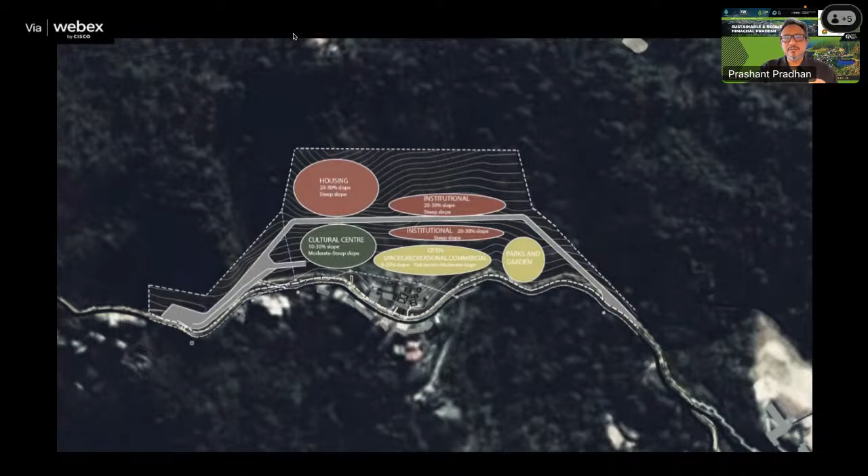Based on what we studied from the slopes, we identified different program types to be located based on how steep or how gradual these slopes were. We thought the residential, the largest component, could be a three-story building, the institutional could be a four-story building, the cultural aspects could be three-story, and commercial would be just single story.

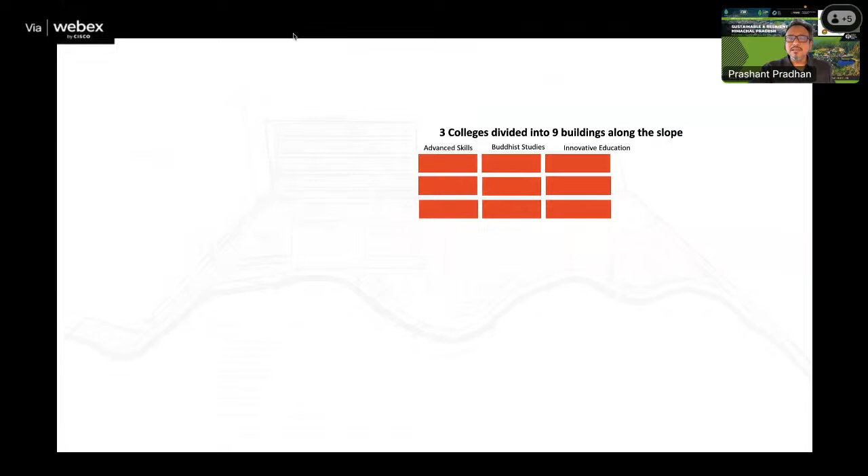So this is how the overall ground coverage of this university would be organized. The colleges would be divided between nine buildings along the slope in this way, the residential divided in that way, the cultural zone here, and we had a large football field in Sikkim. I think it's very important that you provide a football field wherever you can.

We used this symbol, the infinite knot, to bring the whole thing together, and this is what was designed.

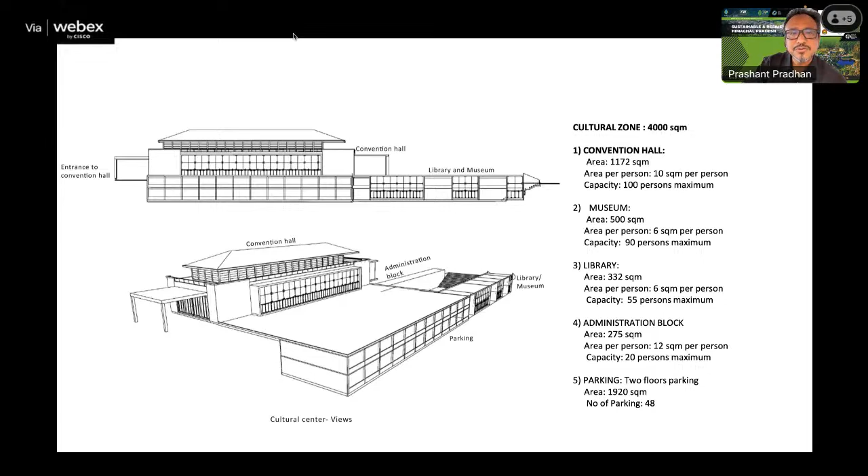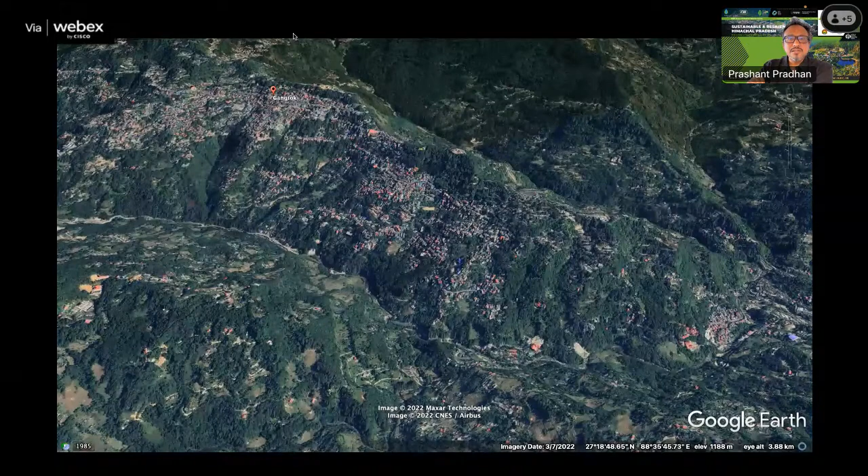Moving on to built projects we have completed in the office: this is walkways and light facilities in Namnang in Gangtok. Gangtok is quite sprawling, as you can see, and one thing unique to Gangtok is that people walk everywhere, and there are dedicated walkways.

MG Marg is one such place where, at one point, it was full of cars, and then they eliminated all the cars and now encourage people to walk there. This is the highway along which there is a dedicated walkway, and this is MG Marg. There seemed to be a gap which wasn't connecting the walkway to MG Marg and the highway, so this was the walkway designed by us.

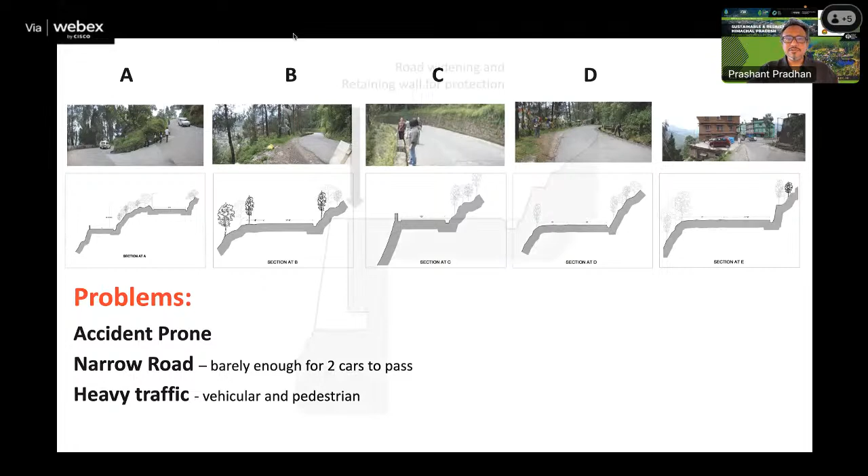The first thing we did was an analysis to identify certain critical areas. The problems were a very narrow road and very heavy traffic. We also noticed there was no real area for designing a walkway, so we gave them a solution to cantilever and create a steel structure beyond the road, after improving the condition of the road.

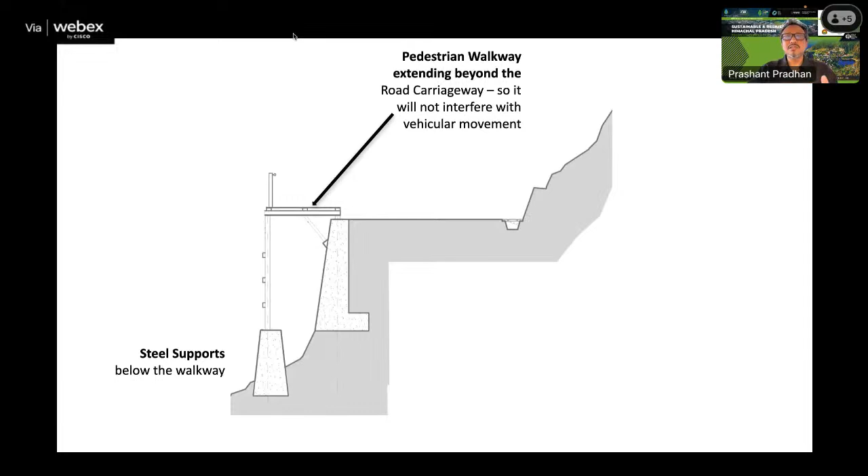So this is the pedestrian walkway. One thing that really bothers me when walking in the hills is you're always holding an umbrella, and in a crowded street the umbrella is always either above you or below you when you cross people. So we thought, why not cover it and have a covered walkway all the way through, to give a nice experience. And finally we got this thing built.

There were some problems with it, of course, as usual in most projects, but we're just happy that it provided a very safe place for children to go to school and for people to go to office using this walkway. We also provided public space which didn't exist in that part of Gangtok town.

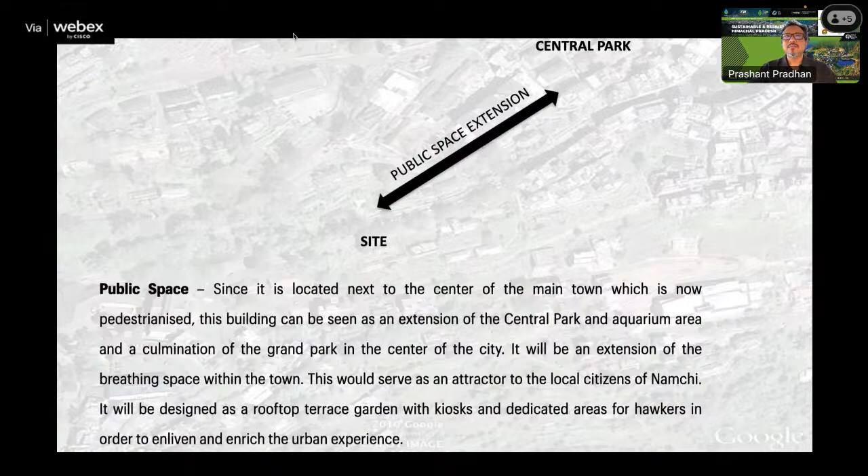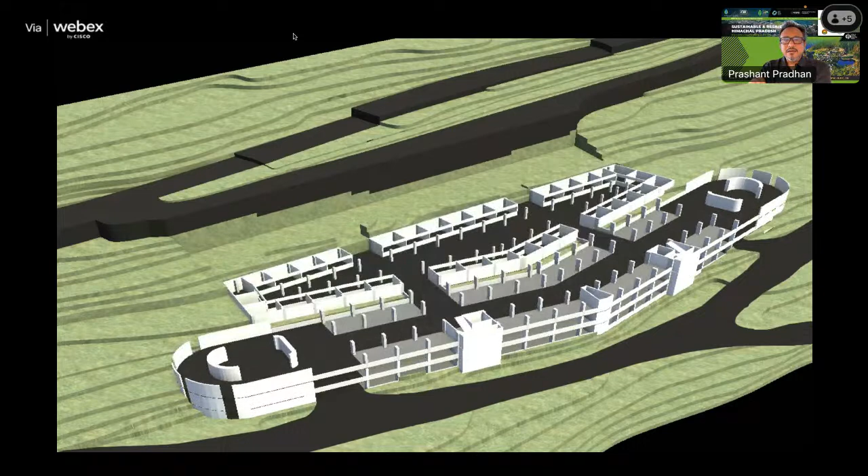What was really interesting is that we had the opportunity to link this road on top and at the bottom through the building, which was very successful and reduced a lot of traffic. On either side of the building we had ramps, and as we went up to the third floor, the Kisan Bazaar started in the middle, but the ramps went all the way up to meet the building on top. You could drive into the building, and through it, exit on the lower side of the building.

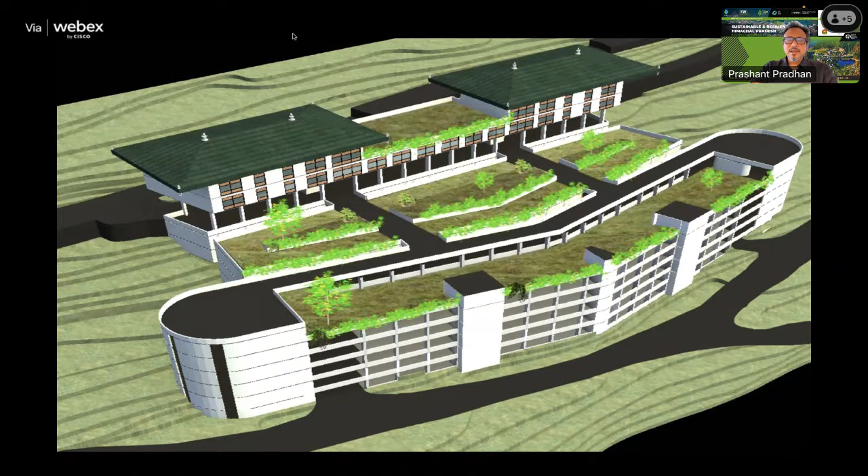So we used that public space and brought it all the way from what is called the Central Park onto the terrace of this building, creating public space there. These are initial sketches, and this is finally what got built. I realize in government projects there is a fair amount of challenge in building and designing, but we were again very happy that this finally got built in this way.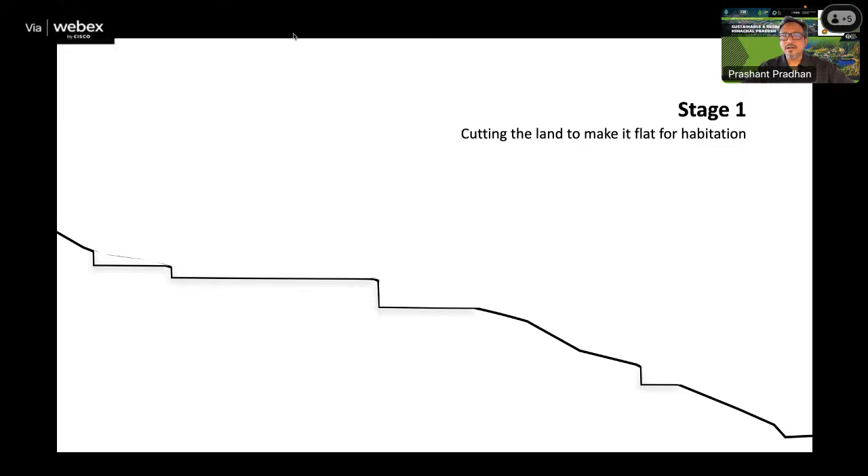The first action we did was to cut the land to make it flat for habitation. And as you can see, we did not cut the land very drastically. We just cut the ground very slightly.

Stage two was the retaining of the earth, so we created these low retaining walls to retain the earth wherever required. The third part was to construct the RCC floors, which created as much open space, in fact more open space than there was built.

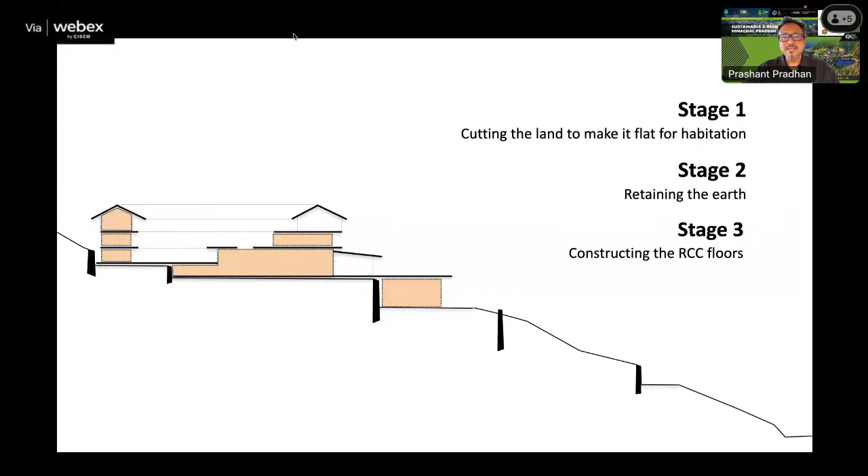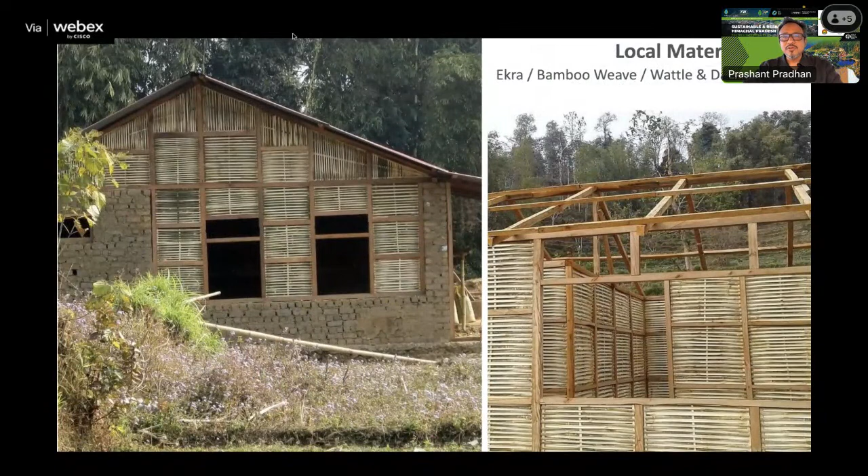We also used local technology, but not on the outside of the building. We used this technology and brought it inside the building to create partition walls. And this is sort of the final view of the building.